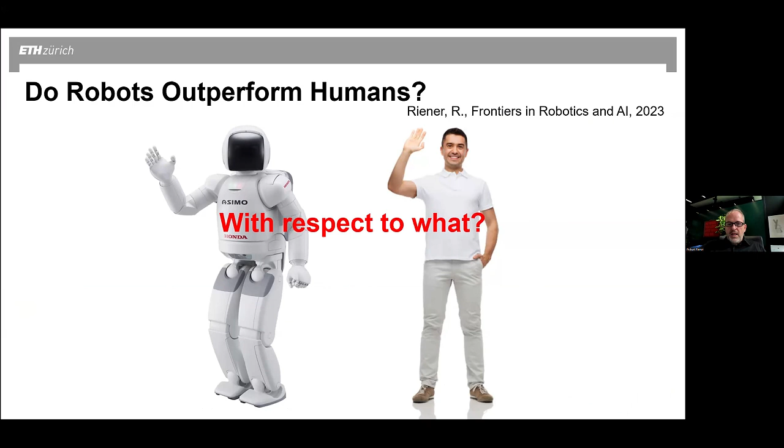So, do robots outperform humans in human-centered domains? If we want to compare the performance of humans and robots, it's of course a question: compare them with respect to what? So we can compare mechanical performance, we can compare optical performance. And here I would say robots do outperform humans just from the point of view that they're not aging, or not aging so much. As you see here, the robot from Ishiguro, and our colleague Ishiguro is kind of struggling with the fact that he's aging faster than his own robot.

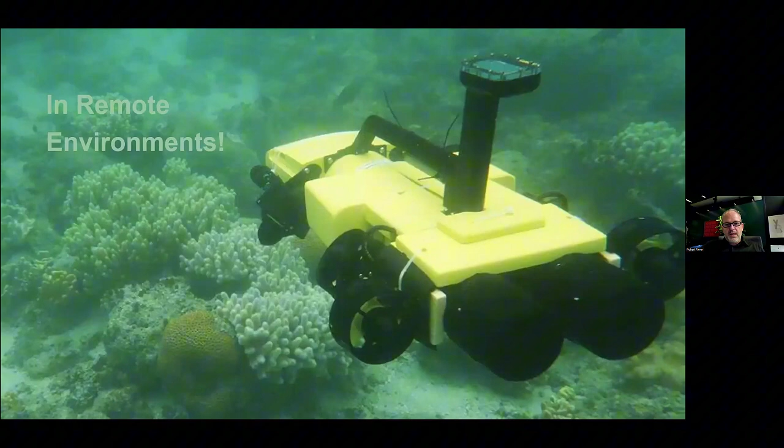We for sure can say that robots do outperform humans in remote environments, such as on Moon or Mars or in the deep sea, because these are areas where we maybe do not want to go or we are not able to go because of the missing atmosphere or the high pressures. But the question is especially interesting when we compare human environments, if we have robots that can outperform us so much that they can really help us or replace us in our own environments. So, some of our robots are successful, like the Roomba robot for vacuum cleaning or robots for cutting the meadow in the garden.

They might outperform us for the task of vacuum cleaning because they're able to go beneath the bed and they're reaching areas which we cannot reach. But they're only outperforming us for vacuum cleaning tasks. They cannot cook for us, neither can they transport something into my car and so on. So they have a missing versatility. So they cannot do too much. Of course, there's a spelling error, versatility.

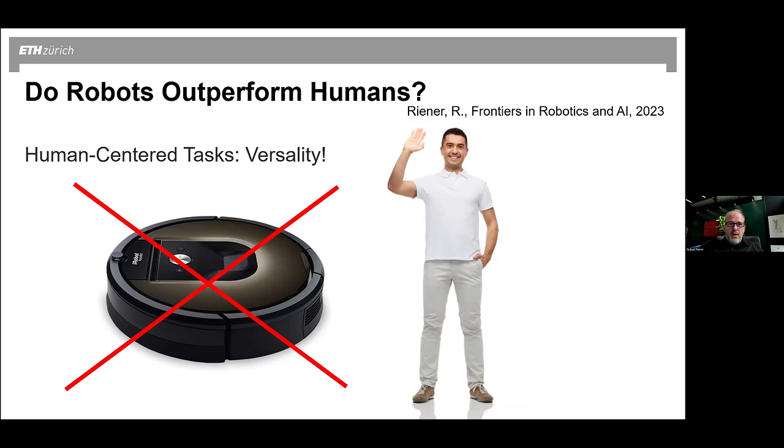So the robots we want to have in our human-centered environments need to have certain properties. They must negotiate rough terrain, maybe in the garden, or be able to walk steps. That's why probably it's better to have legs rather than wheels. Furthermore, they should fit through narrow spaces, for example, through doors or through crowds of humans. So they should have a slender appearance, not flat on the ground, but tall when standing. They should be able to reach tables or shelves just to oversee them with cameras, but also to interact with them, to grasp objects, for example.

They must also be able to perform work. So passive walking machines are not satisfactory. They need to be able to carry objects from A to B. And that's also why we exclude flying machines, because their payloads are maybe too little for many of the tasks we need to do in our daily life environments. They also must have fingers and arms to be able to perform manipulations. At least the robots we were investigating should have a possibility to be added arms and fingers so that they could do additional tasks.

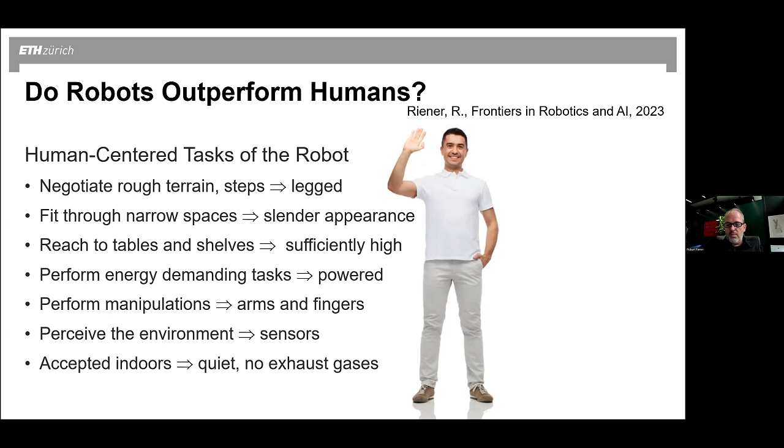And they must be able to perceive the environment, of course, not only to control their own movement, but also to understand the problem, to understand the context. And that's why, of course, we need different kinds of sensors. And since they should also work in indoor environments, they should not be too loud and not produce exhaust gases as we get them from combustion machines. That's why we end up automatically with humanoid robots. If you want to compare humans with robots, we don't need to compare only humanoid robots. But if you speak about humans and robots in human-centered domains, then we end up with humanoid robots, which have similar shapes, anatomy like we have.

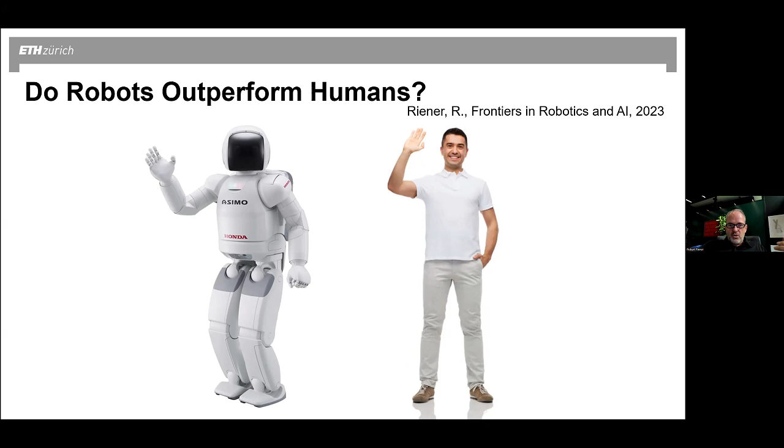Now, the next question is, what do we want to compare in detail? We can compare functions which humans do. Are they able to be done also by robots? But we can also compare structures. Are the motors better? Are the joints better? Are the sensors better in the robots compared to the human? What we did in our study is we compared both. But then the question is, there are some functions in us humans which maybe do not make sense to be compared. For example, the fact that we are aging, that's more a disadvantage.

So we exclude that function, for example. The feeling of emotion, that's maybe something too complicated. We also excluded that in our study. And also the fact that we humans can reproduce is something which we exclude. We don't want to develop a sex machine. So we want to develop robots which help in human-centered domains for mechanical tasks.

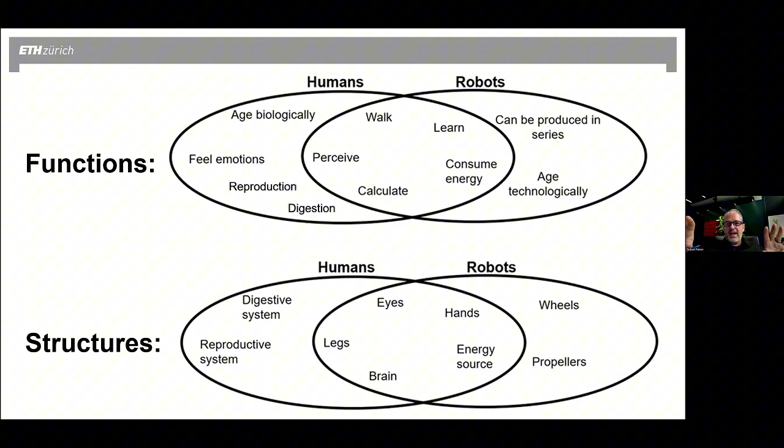And also the aspect of digestion is, of course, very important for us humans, that we can eat, and that gives us power. But in the robots, the charging works in a different way. The robots don't need to eat or drink. We just need to charge them. That's why we also exclude such aspects. On the robot side, we also exclude the aspect of how they are being produced, and how they are aging from a technical point of view.

So what is remaining are functions which are supportive for our daily life activities, which includes walking, learning of movements, calculating to process sensory information, for example, perception. But besides walking, we have many other mechanical tasks, such as grasping, such as manipulating objects. And all of this consumes energy. That's why it's also important to be compared between robots and humans.

With the structures, it's a similar problem. We exclude the digestive system, the reproductive system in humans, and we also exclude propellers and wheels on the robot side, with the argumentation, as I had before, that we want to have machines which are able to interact with humans in human-centered domains. The leftovers are then structures such as eyes or cameras, hands, legs, the brain or computer, and then the energy source.

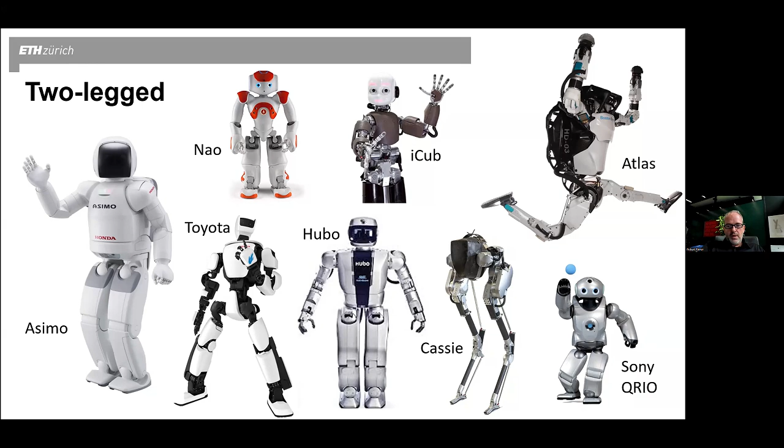Now, the study we did is already some years ago, so we have included all robots which were known at that time, or most of them. Some of the famous robots which we have nowadays, like the Optimus from Tesla, we did not include in that intensity as we included these machines, as you see here. This is just a sub-choice. We have found more than 30 humanoid robots which made sense to compare, the newest ones, but also some older ones. Here you see some of them. We also included four-legged machines. You see some of them here.

And then we compared functions, for example, walking and running. To compare walking, it's easy to outperform the humans with the robots. Many of them can walk faster than we can. With running, it gets more exciting. Here you see some of the robots which are well known, like the Atlas, for example, or the Asimo from Honda, Big Dog from Boston Dynamics.

And the maximum speeds we could find in the literature or technical data sheets were up to about 2 or 3, maybe 4 meters per second. That's about 12 to 14 kilometers per hour. That's a good performance for these machines. I mean, it's amazing how well they can walk nowadays. If you take a human jogging, it's always faster.

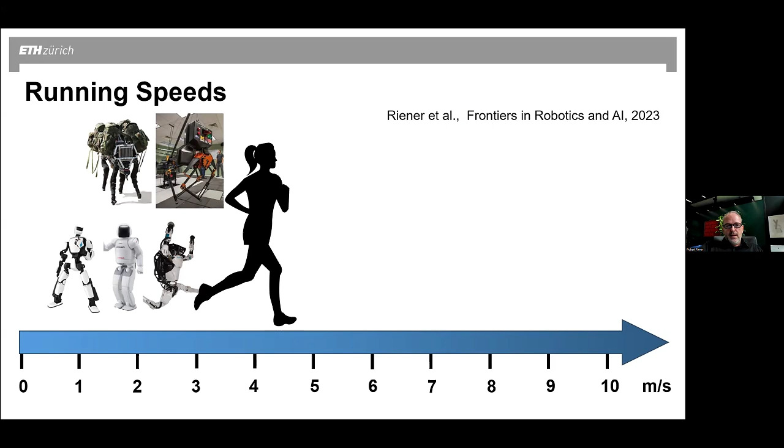However, there's one robot which is outperforming the other robots. That's the MIT Cheetah. That can run up to about 6-7 meters per second. So that's more than 20 kilometers per hour. It's faster than a human jogger, but if a human is sprinting, and you don't need to take an Olympic star, just a normal, less athletic human sprinting is faster than the fastest legged robots we have nowadays.

This is just the absolute numbers of walking speed or running speed which we found. It could be an unfair comparison if we don't normalize by some important denominators. So imagine if you take a very, very big robot, as large as a house, and if you're able to power it, it gets very heavy and large, but probably such a robot has an easy job to outperform us, because if it just does single slow steps, and one step is like 10 meters wide, then it can outperform us probably easily, but at the cost of size and weight.

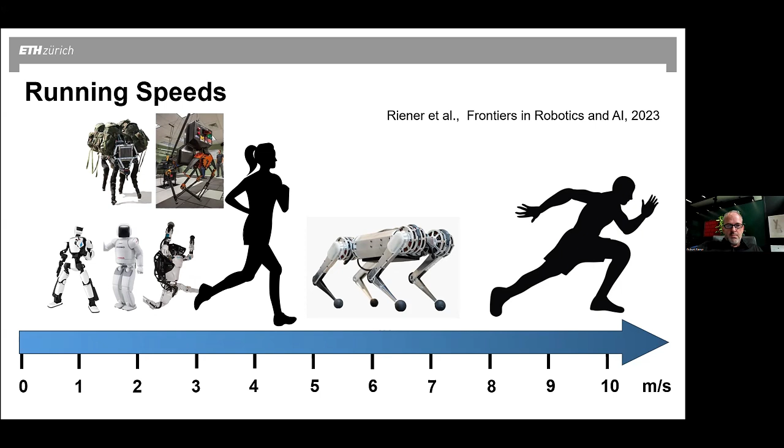However, if you take again the human athlete, then we can say, okay, it's about in the same range when we take the speed and normalize it by the mass. But if you take operational time of machines, unfortunately, most of the machines don't work so long because the batteries get empty. For those devices where we got data, they can work up to about 1.5 hours. Atlas, for example. Cassie is a bit better. It's about 3 hours of operational time.

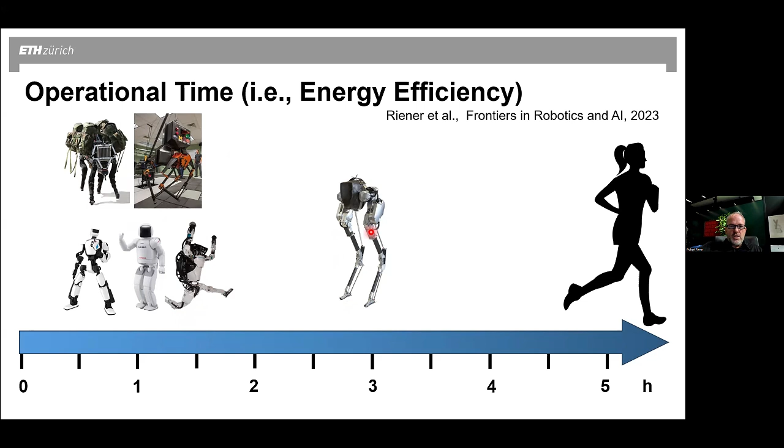Of course, there are some amazing tasks. Making a backflip, the Atlas robot, the old hydraulic one. Or lifting objects, maybe. There are some robots which are very strong. I would say at least as good as athletic persons. But I would not say that the best robots outperform the best humans, which are maybe athletes.

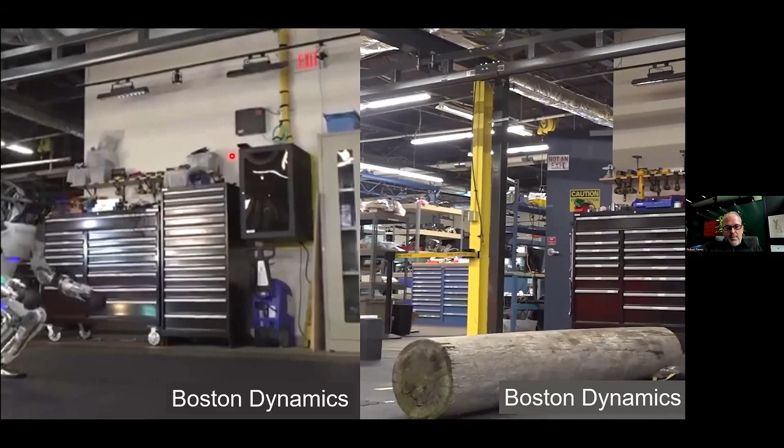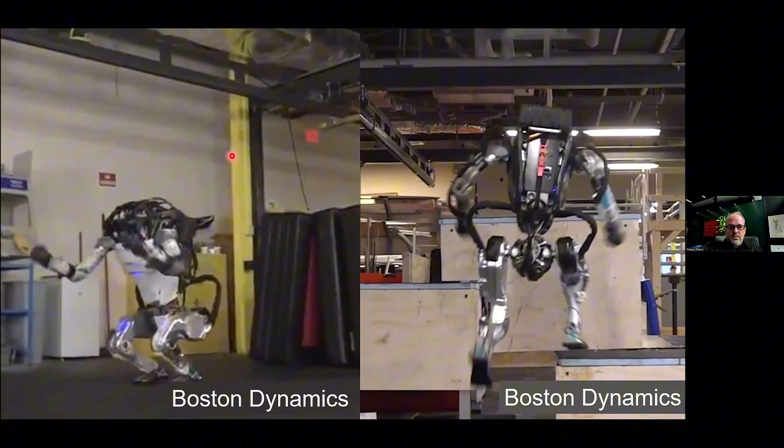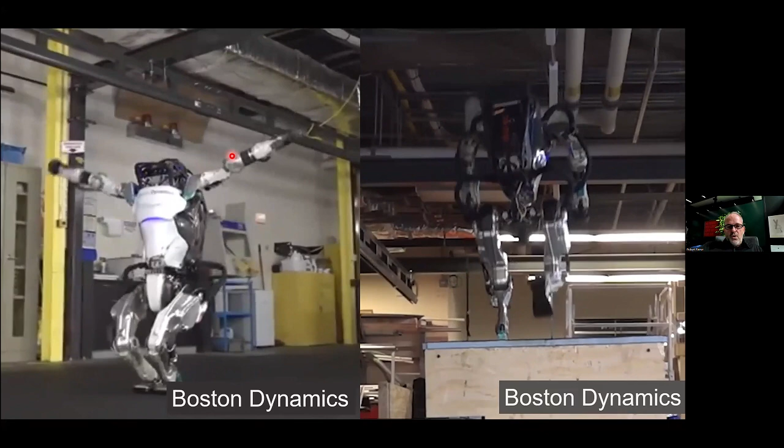You probably know these movies of the old Atlas robot, maybe 4 years old. It's amazing what the robot can do, but again, the versatility of humans is not there. And the best humans can also do this. And what we know from Marc Raibert, who admits this himself, is that it takes some trials to get these movies. The movies are, of course, not fake, but it might need maybe 10 repetitions to get it like this. And you have a team of engineers behind tuning the robots.

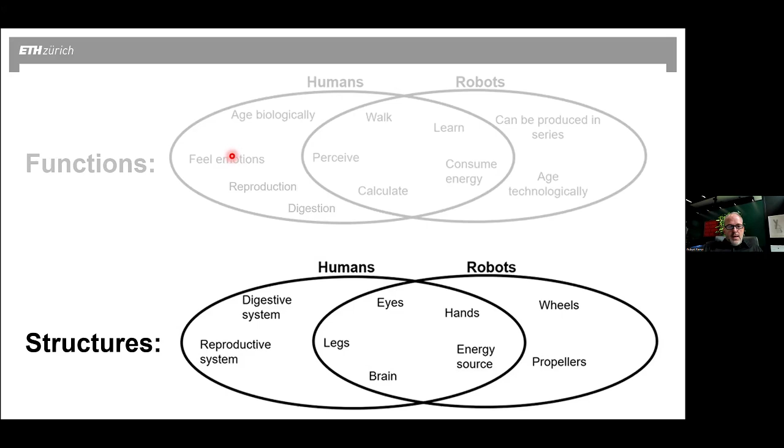Now let's look at the structures. To summarize the function, I would say there are some robots which are as good as average humans, but just in single tasks. What about the structures? Motors, for example. If you take characteristics such as power density, here we also normalize by mass, that's why we speak about power density, also force density, energy efficiency. Then we can say that there are motors which are outperforming the human already.

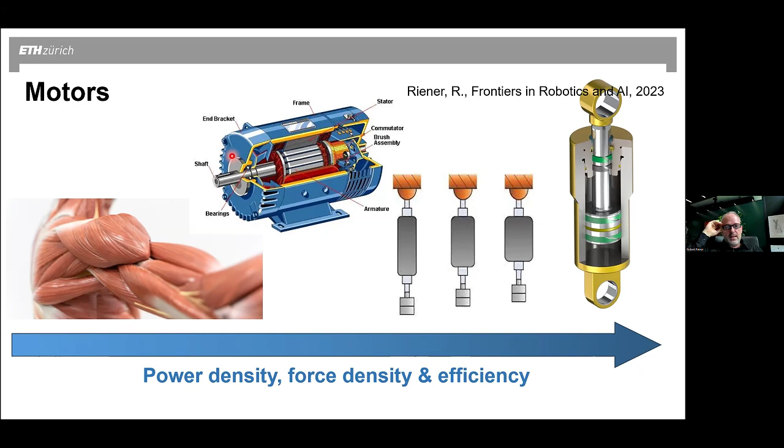There's a little but. The but is that some of these actuators, for example the fluidic ones, pneumatic and hydraulic, are tethered. They are cabled with tubes, hoses, for the supply of the pressurized air or pressurized oil. And often the energy or the pressurized liquid is outside of the robot. That's why they are tethered. And the compressor in the hydraulic ones is often outside, far away from the robot. And then you can make the mass of the device quite reasonable. With Atlas, we have everything on board and it still has a quite good power to weight ratio.

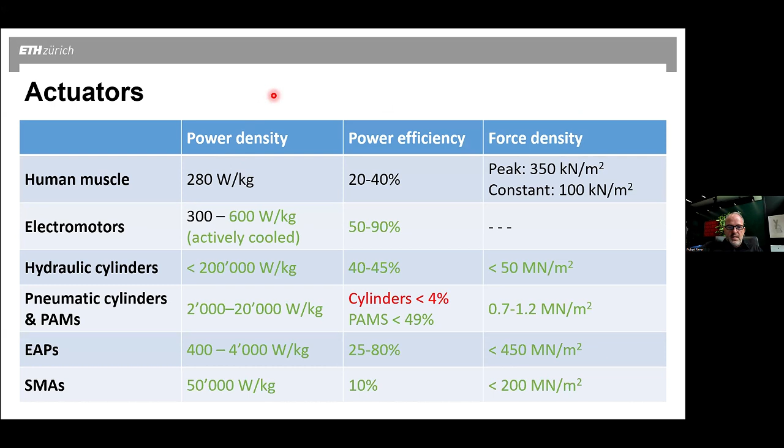In more detail, you see here some numbers of the human muscle: power density, power efficiency, force density. If you take electromotors, hydraulic cylinders, pneumatic cylinders, electroactive polymers, and shape memory actuators, we see that almost all of the characteristics are better in the machines. In pneumatics, the efficiency of pneumatic cylinders is not so good because they have a lot of friction. But the muscle is also not so good, 20 to 40%.

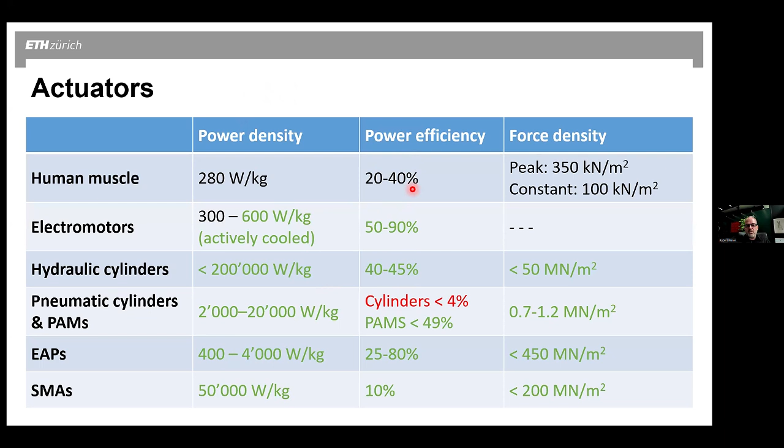But electromotors or hydraulic cylinders do outperform the human muscle with respect to power efficiency. So you see, with motors, actuators, at least when they're tethered, they're easily outperforming human muscle with respect to these characteristics, of course, not with respect to self-healing or such stuff, which we did exclude at the beginning.

What about the materials and the strength, breaking strength, elastic properties, strength in relation to the weight? Here, the bone is amazingly strong, but in the meantime, we have materials like carbon, which have a better strength to weight ratio.

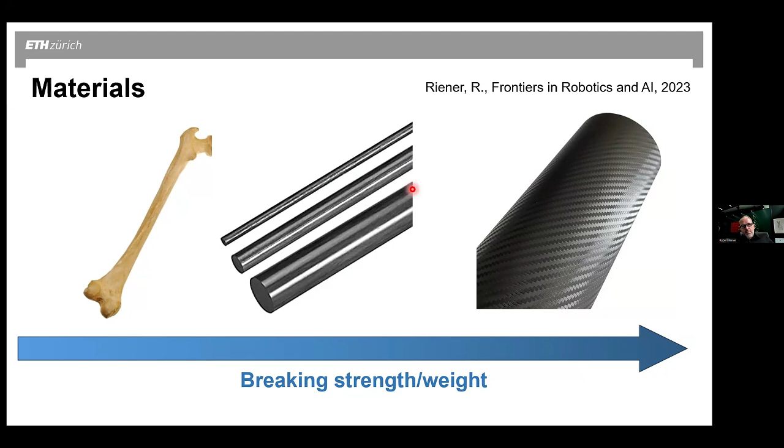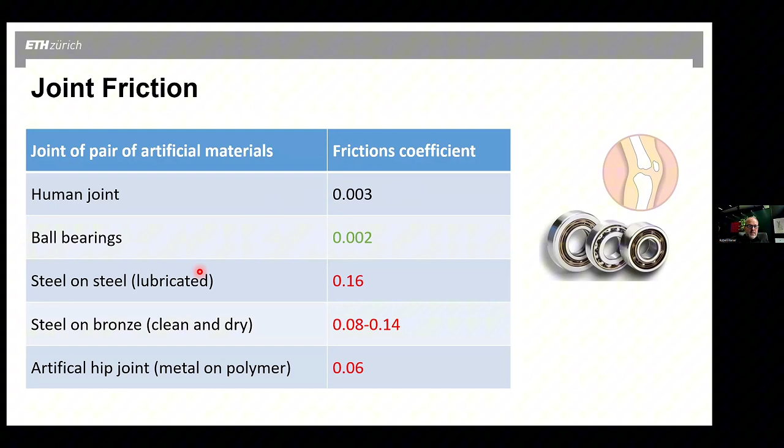What about joint friction? Human joints are very nicely lubricated with some liquids. Friction is rather low, thanks also to special pairing of different materials, the cartilage, the joints, for example, including the lubrication. But ball bearings are better than human joints. Other bearings, friction bearings, are usually worse than the human joint, but the ball bearings easily outperform human joints.

What about motion sensors, such as to measure joints, joint angles, sensors to measure speed and accelerations, such as done by IMUs, and force sensors to measure forces, torques, but also pressure. Here we have a large choice of many different sensors, many of them commercially available, and they're easily outperforming the accuracy of our human sensors.

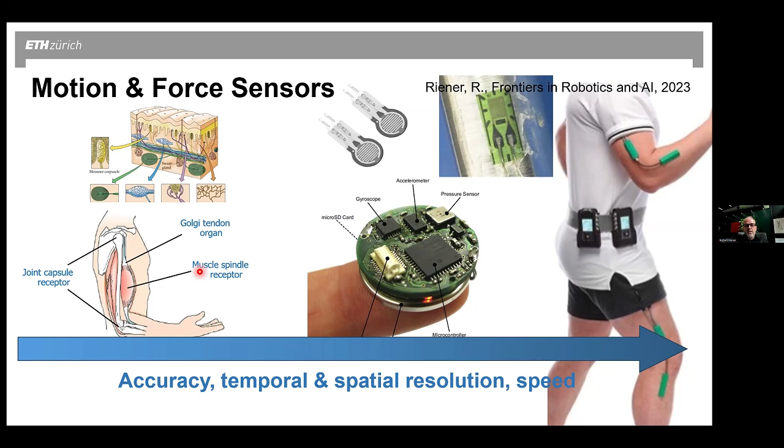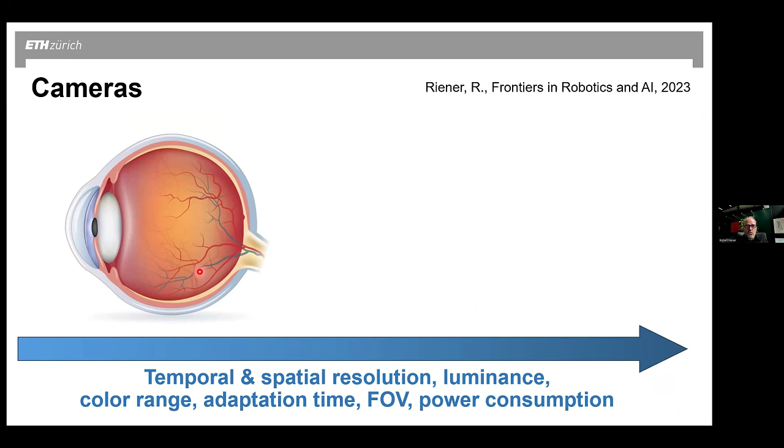Cameras, that's an exciting, although a bit complicated aspect because there are many characteristics which we can compare when we take a technical camera and compare it with a human eye. And you see, when we combine conventional CCD or RGB cameras with event-based cameras, if you take both of them, then I can tell you we can even outperform the great human eye. You see it in more detail in this table.

What about computational power? Of course, if we take terms like intelligence, human intelligence, our ability to solve problems, to adapt to new situations from our cognition, that's very difficult to outperform by a computer. But using a computer to control movement, complex movements, I would say with respect to computational time and memory storage, the computers are outperforming the human brain easily, at least if you take a big computer or a cloud of computers.

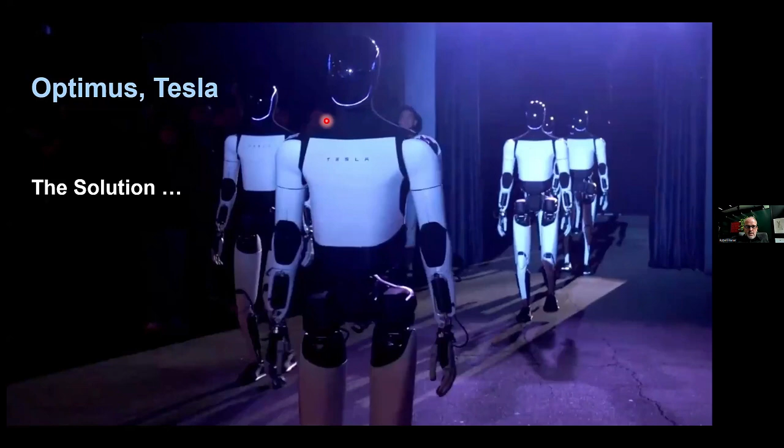So now in the last months, we saw great movies, and I'm watching social media. About a year ago there were the first movies from the Tesla Optimus robot, and just recently, some days ago, we saw other great movies from the new Atlas from Boston Dynamics. And it's amazing how well they can perform, what kind of motor tasks they can do, including crawling, making different kinds of jumps. But when you look carefully, for example, at the latest movies from Tesla, as an expert, I'm still not convinced. I think it's still just mania hype.

I saw some movies where Optimus is grasping eggs. But I didn't see any movie where the robot is opening the egg and putting it into a saucepan. The robot can carry objects, but it looks a bit shaky, and the objects look a bit lightweight. They don't look heavy. I don't believe that they are carrying high weights.

Furthermore, they can fill a glass of beer using a tap, but I did not see any robot yet taking an opener and opening a bottle with this little Kronkorken. And they can serve us humans, but only as long as the battery holds. Maybe after 1 or 2 hours, they're useless, or they have to get recharged and they're not available to serve me. So that's why I'm still very skeptical.

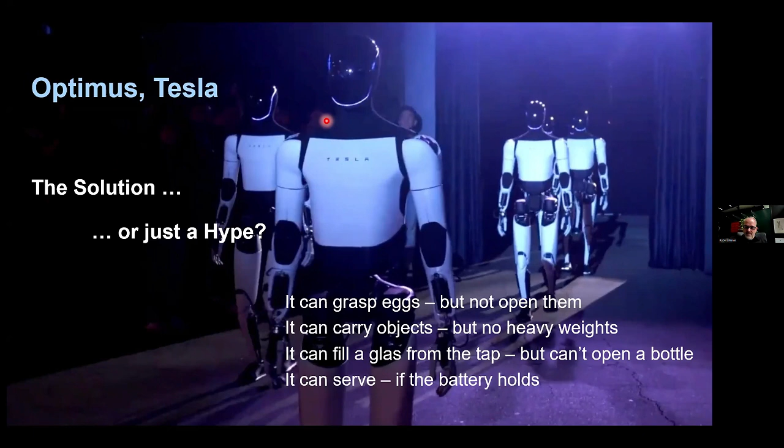To summarize, robotic structures in general are better than human structures already. That's amazing. However, somehow we as engineers were not able to find a systematic approach to combine these structures in a way that we also get better functions. That's a bit surprising. And I believe it's just a matter of time to make the robots better. What we need is better motion intelligence. We have to do better controlling and learning of the robots. Reinforcement learning is, of course, something with great potential.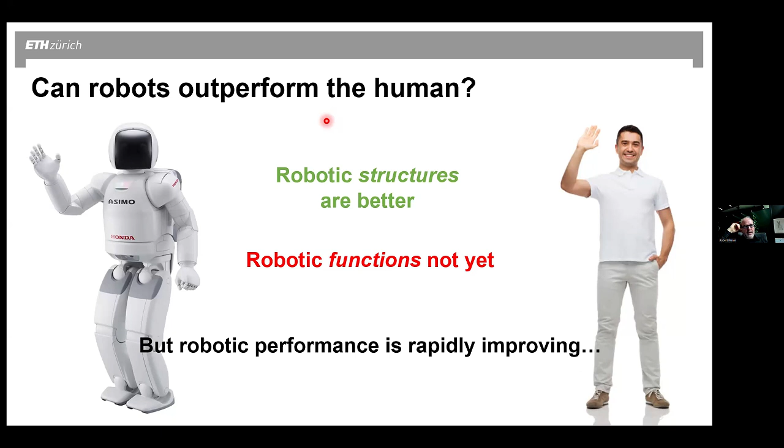We have to optimize the size and the arrangement of the structures to put everything into a limited space. And that's why I'm not too pessimistic. It's a matter of time, and I think it doesn't take too long that the robots will outperform the humans because they're getting better and better. But it takes more time than many people, at least the laypersons, believe. I still think it takes 10, 20 years maybe.

Okay, thank you. Thanks a lot. That's a really exciting talk.

Yeah, we have a couple of questions from the audience, and then also I have a question to start. So yesterday a lot of us talked about smart bodies for robots, especially intelligent robotic hardware. So in your opinion, what are the main bottlenecks in the robot hardware to develop robots that outperform humans? Yes.

I think the hardware itself is not bad already. I mean, if you just take the main components like motors, sensors, the mechanical links, joints, they are great to solve specific problems. And we are able, as engineers and computer scientists and biologists, to place hardware in a way that they solve one task.

But as soon as we have a collection of tasks to be solved, the arrangement of the hardware, but also the control using control software is getting much more complicated. It's magnitudes of higher complexity. And we somehow fail to solve it. Have you ever seen a robot which can do these tasks very easily? We can do it easily, and we can additionally do different tasks. And the robots fail these more complex tasks. Yeah, absolutely.